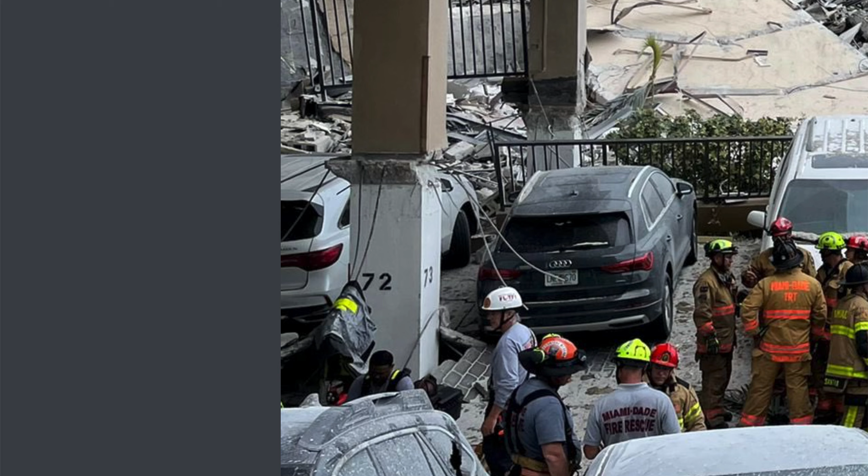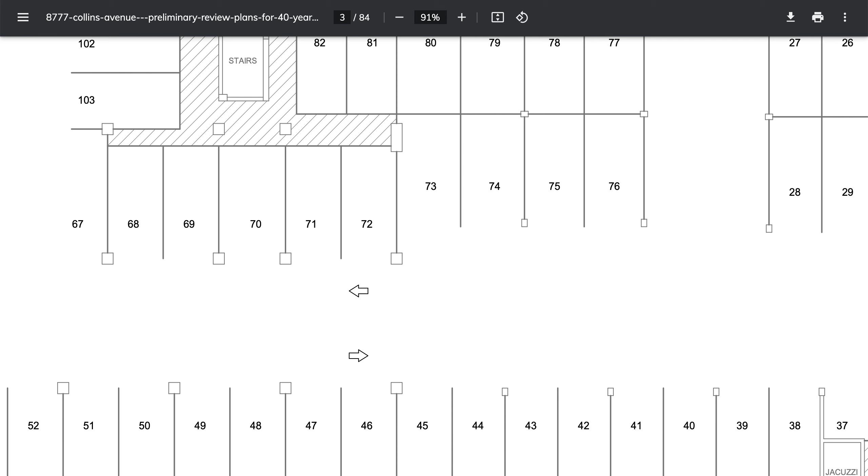This aligns with the parking garage failure. This is the top of the structure where the parking garage fails. Going back to the Twitter image people are sharing with me also, that's over here, but let's see if I tab over one, if this works. Not yet, or maybe it's over here in this Twitter one. So I zoom out, and there's the reinforcement. The reinforcement is going here, it's inside this image. It shows that the reinforcement is falling down.

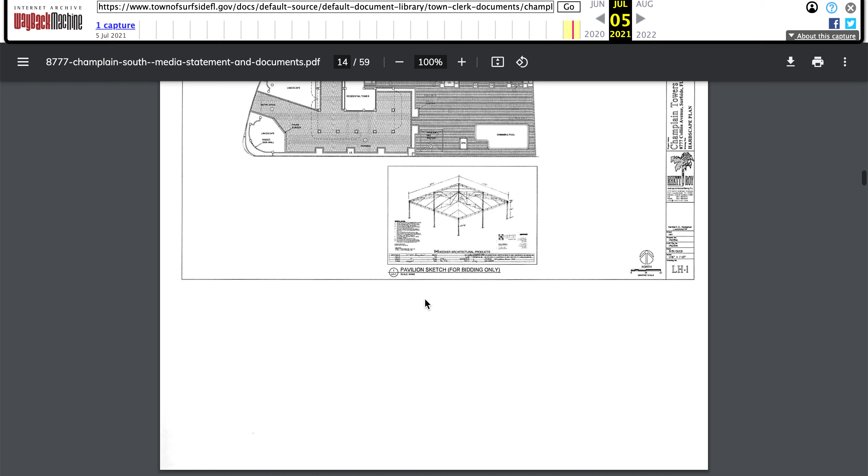Yeah, we're going to page 14 of 59. I think I sent the person, told him to go down to the bottom of this doc. Yeah, you can't quite read it. This looks like the failure, you can zoom in all you want. Maybe you can download it and it changes, but it looks like the failure area here on the deck side.

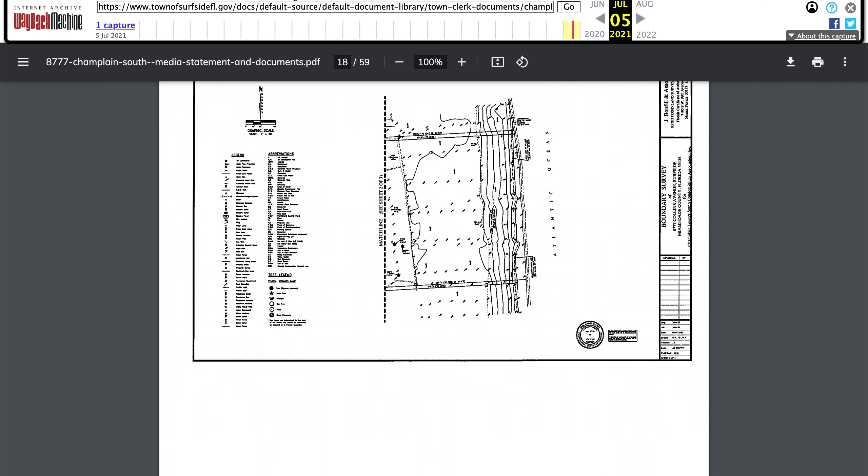There's data in here, but it's very small print. And that's right here, if you want to find it you'd have to drop this tab down. Yeah, you just go to the docs under media docs, it's a new one, I think it's near the top of the page. There's a page, 59 pages.

They want to do some reinforcement there into the piers and anchorage. That's pretty critical. Never happened.

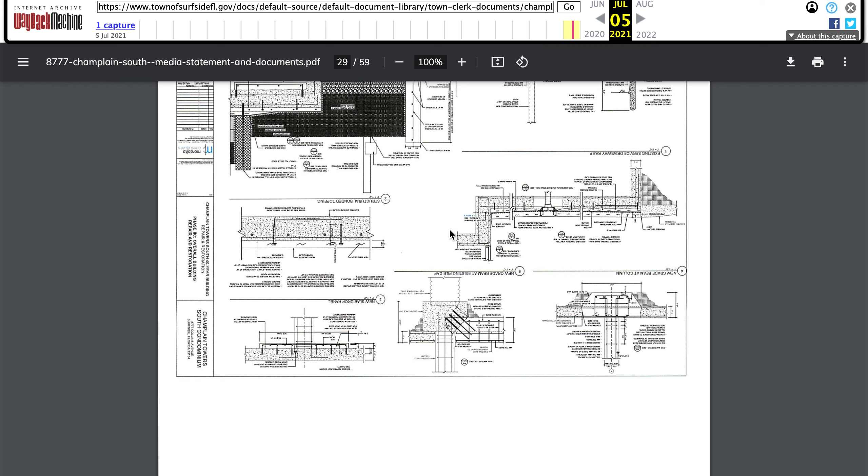Now I have an interesting statement. I have somebody from one of the boards call, I won't leave his name, but he's on one of the boards for the Civic Association. We had an academic conversation, and I said, they probably had a vote on these repairs a couple years ago, and the money's limited on what they can sue for, because there's so much of it, and it won't go around enough.

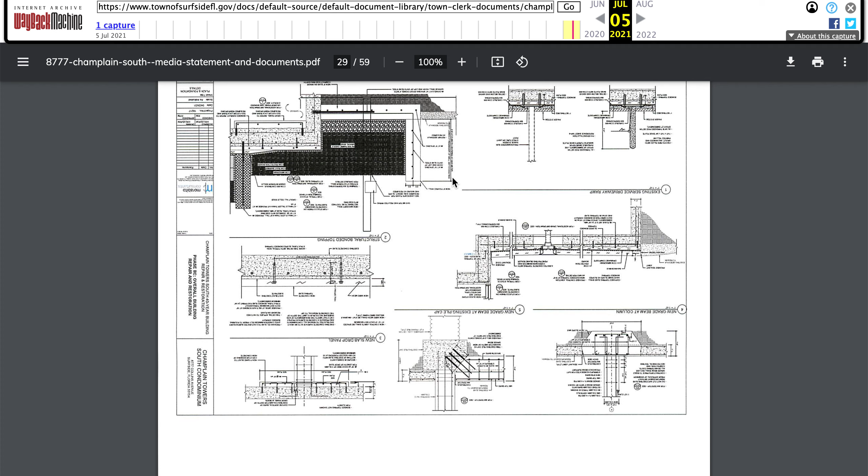So I said, you know what they should do? They should look at everybody who voted in 2018, if a vote took place. Everybody who voted against giving money to do repairs shouldn't be part of the lawsuit today. They should say, you can have your lawsuit, but you're last.

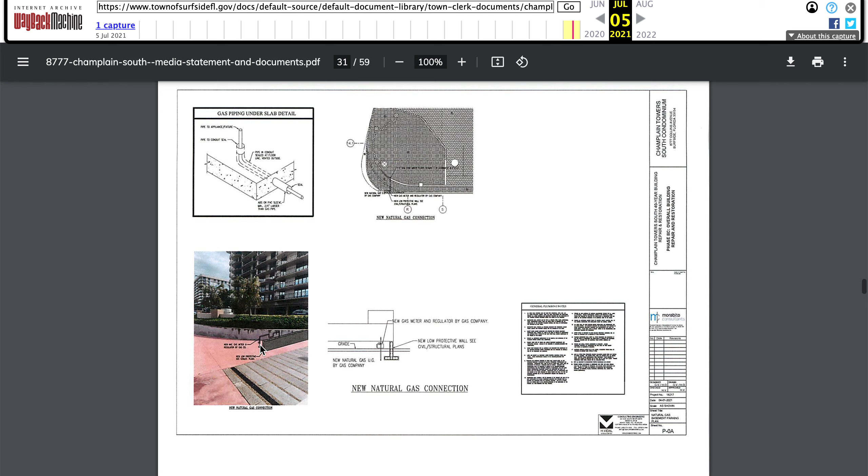The first bit of money, everybody who voted to do the repairs and adjust and pay for the increase should be the first members to collect on the money that might be present.

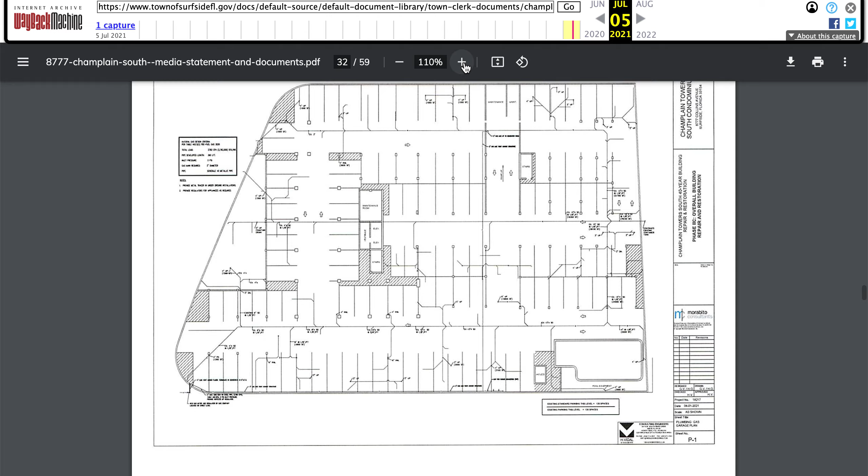Now, these are your lines. See, I'm trying to zoom in, but as I do, I lose it. So I might be able to download this file, and somebody else might beat me to it, and you'll get more clarity on what the lines are.

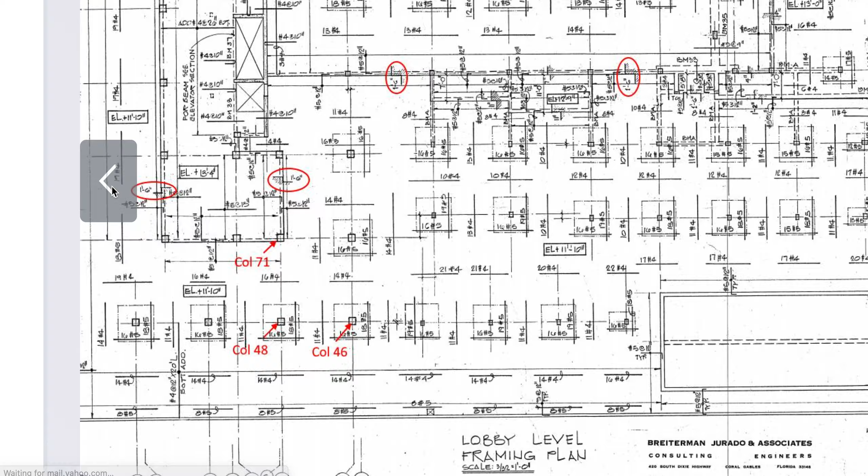The person sent me an image, this one. It says this is what the 1'6" looks like, and in their opinion the 1'6" is this beam, and here's now your elevation change of 1'6". So even though it may not indicate well here, this would be the garage floor before you step up into the building, and there's your 1'6".

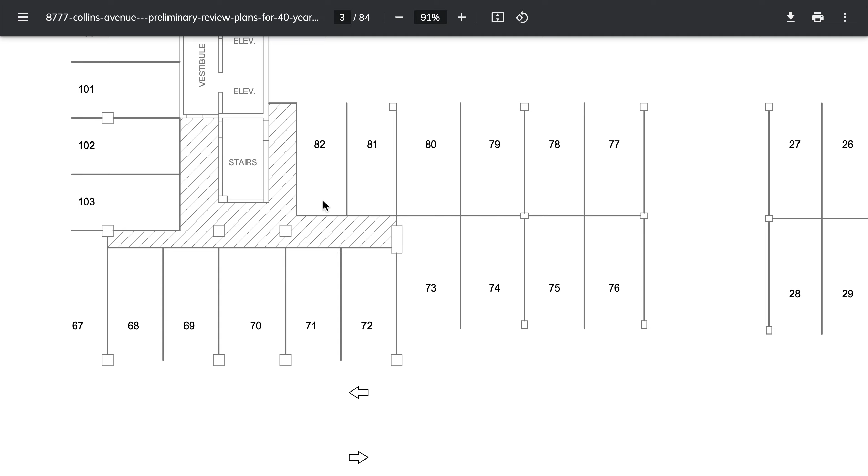Let's go to the drawings. So he's saying the 1'6" is here, not here. The 1'6" is here's our elevation change, which I need the actual drawings to show you.

Let's see... where'd you hide out? Where'd you hide out? I had them up and ready, but okay, let me skip over to this first.

I had an engineer who's trolling me on here, and you're not the first one to try to troll me, and I'm going to be quite nasty in a minute here. So they said you should use a finite element program, specifically a STAAD program, S-T-A-A-D.

STAAD, they can try to model your program. You put in the size, members, etc., and they'll try to find your moments, your issues you may have that you have to resolve.

This is equivalent to saying this doesn't work. This works with new construction. It does not work with 40-year-old construction. I can't enter into this no matter what they tell you. You can't enter into this.

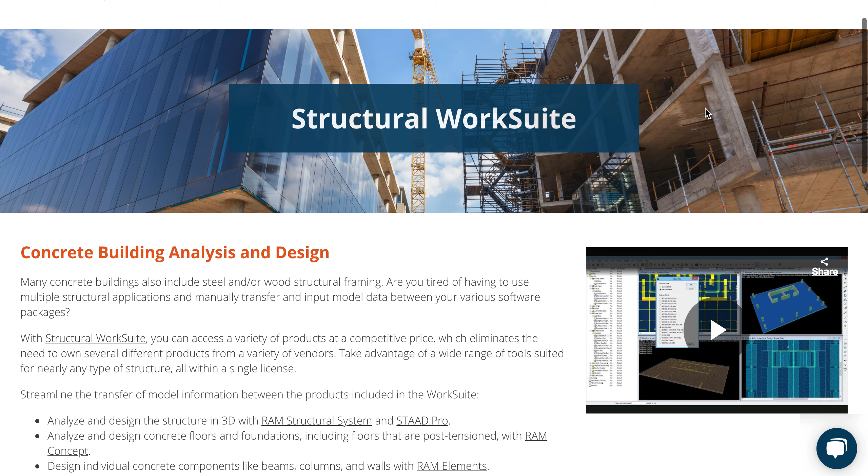Okay, I'm entering in now on this beam the contractor put in, because you'd have to know what each beam was like. This contractor put in a beam with the profile steel here, here, and here. He used a steel that was really tested at pull-out at X amount of strength, and he used concrete that was 4,000 psi that really failed at 3,600. So you would have to know all these details to redesign a building, and then you would have to add 40 years to it. How do you put 40 years of use onto this?

This should be equivalent, some of you mechanics out there can understand this a lot better. You're buying a 40-year-old car, and I tell you, hey, how's my car, run it in your software program. You're like, my software program runs on new cars. You're like, run it on my new car.

Your car's not new, it's 40 years old. So it takes an old school mechanic to get there and start looking at every single joint, every single connection. They say, okay, look, you got some ball joint problems here. You got disc brakes, but they're okay, they met the requirement then. Your lines are rusted, you're gonna need this to make this work.

So telling me that I have to run a program like that is telling me you don't understand structures, that you're a PE and you don't understand structures' behavior, that they will not behave. A 40-year-old structure will not behave with all that, and you need to know how it's built, like any of these programs can run. There is no model for it.

If it's a new construction building, you might be able to run a model for it if you knew exactly the layout of the steel, because this was all in situ, done in the field, placed together. We don't know what time they removed the form, so what was the actual PSI testing of this? The pull out - we don't know a lot of this stuff.

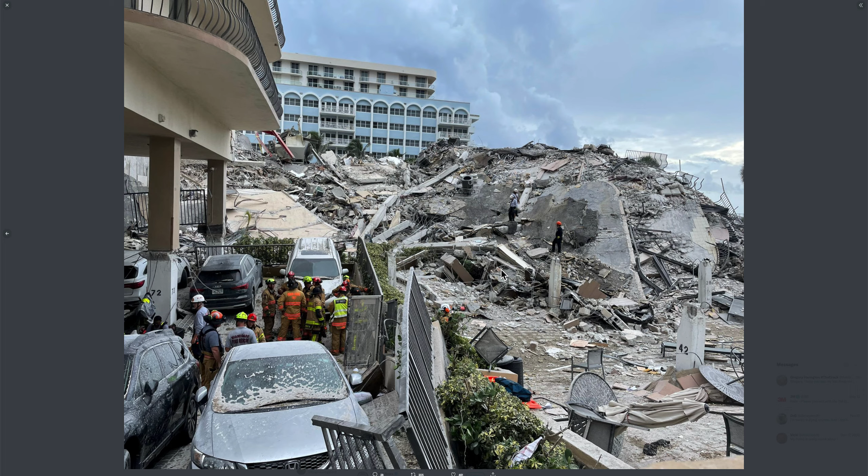All right, so now we have the - okay, so there's two images in here or not. Let me see, no okay, I don't see two images. So I can get that, I'm starting to eliminate it. I'm trying to get back to the 1.6 here.

The elevation change into the lobby. So they changed it, they sent me - oh right, they sent me a photograph. All right, so there's column 46.

And so this is 48. This is where, oddly, this is right about where they were going into the ceiling to try to find somebody. Isn't that odd? Because isn't that 48? If that's 48, doesn't 48 put us outside in the damn parking garage area, above the second deck and the open air? That is the confusing part.

I'll get to the comments. Isn't this out here? Here are the columns coming up. Here's our elevation change, here's that curtain wall, the glass wall, and this is outside. So we see them drilling in the parking lot, but it seems like they're there. But because it seemed like it was open there at one point, apparently they were drilling somewhere else.

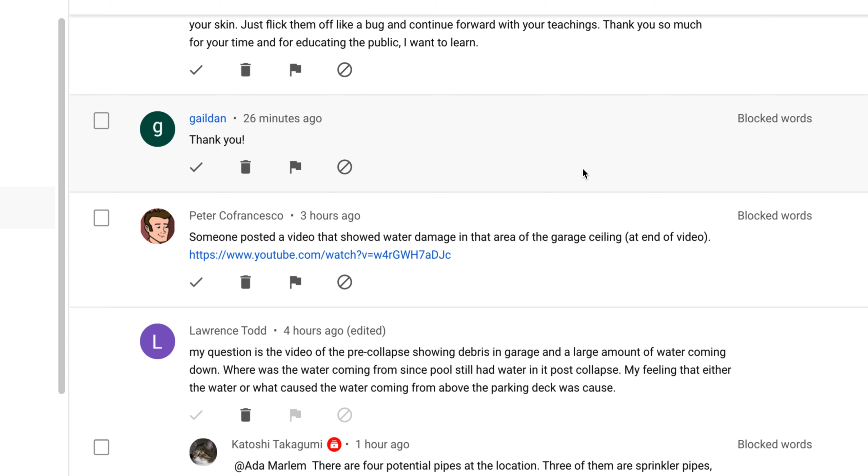We need to get those columns. I know one was red at the bottom. All right, so that was interesting there. And this wire doesn't appear to be in the way in the video. The 1.6, where the hell is that drawing now?

So I go over - I already told you about this. This is a simple metal detector that will tell you the depth of your rebar, so you can help figure out the profile of the deck, where the steel is.

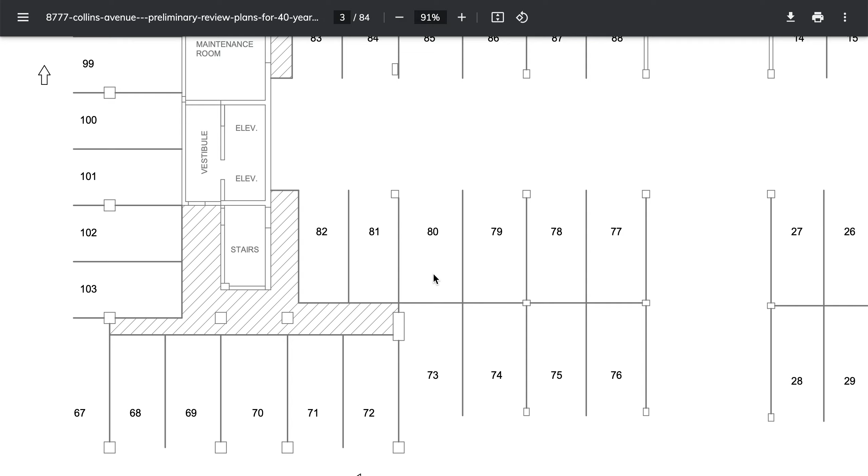All right, so then we have all these cars out here. Here's the end of the structure with the cars parked here. And then here is where you go into a doorway, elevator, vestibule, elevator, stairs. So you're coming to the structure. Let's see, she comes out of that room. Oops, that's the ramp, right?

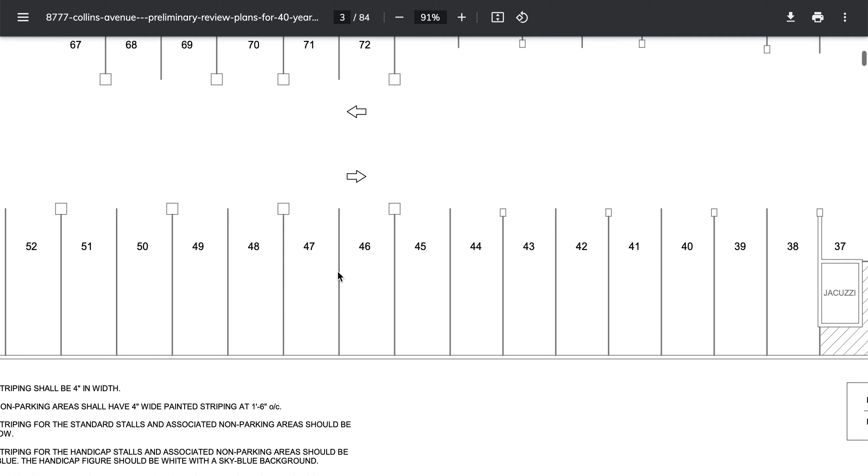This is the basement level. So I'm visualizing the basement level from this point. Right, that's what I wrote the guy, saying he got me in a basement. But let's go with 72. Let's go, where's the damn video?

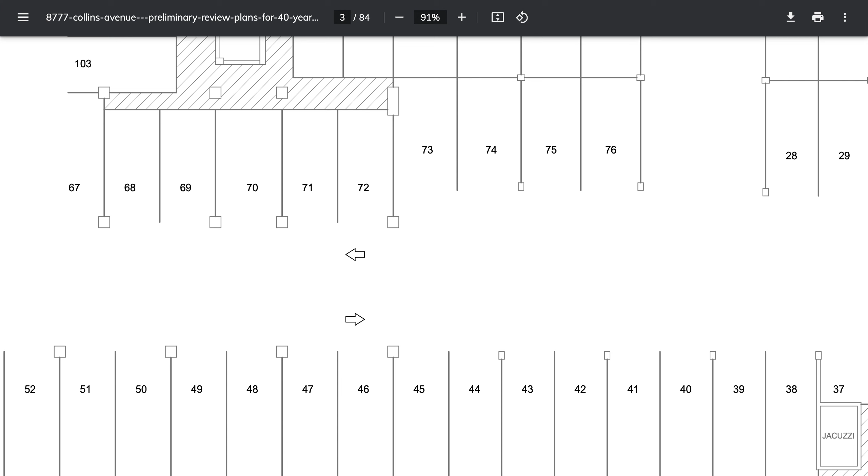So there we go, let's fast forward a bit. So there's the cars out there. And press play. So there's the elevator shaft - elevator shaft would be here. So that person filming is in the upstairs level above the vestibule here, and this is the maintenance room. The ramp's over here. So let's do that again, back to the video.

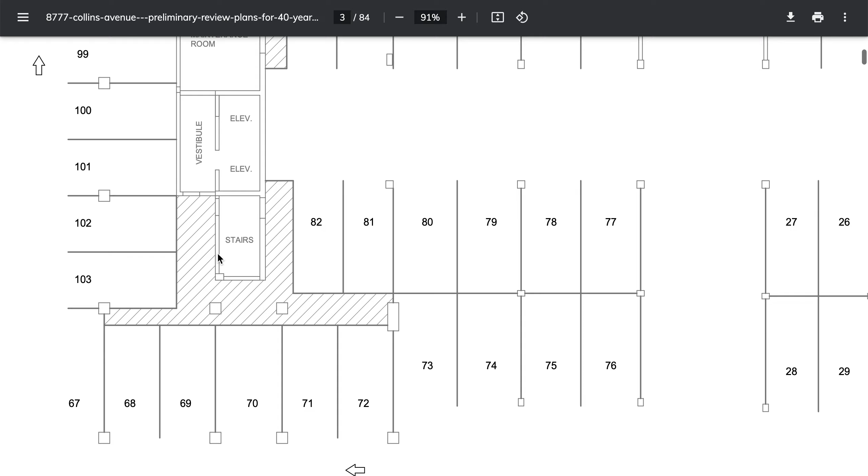So there's the entrance, left turn. There was a car, see the car to your left? So the car to your left would be on the first level, and that would not be on this level because we're in the garage level down low.

So there's the ramp down low. There's the cars on the top level, and that's the exterior wall. Again parallel there, so there's the cars out there. Let's go above. Well, they might do a bit of a bump out at that point, but then you get my intent. See the bit of a bump out or recess there.

All right, elevator, and I don't know if they're going to jump upstairs yet, but I'll jump to the end of the video. That was magic, he disappeared.

All right, it's room 611. This room, you guys can look at it, it's the same as the room in 711 where the cracks happen. So there's nothing really to beat up there at this time, but we'll go to the garage.

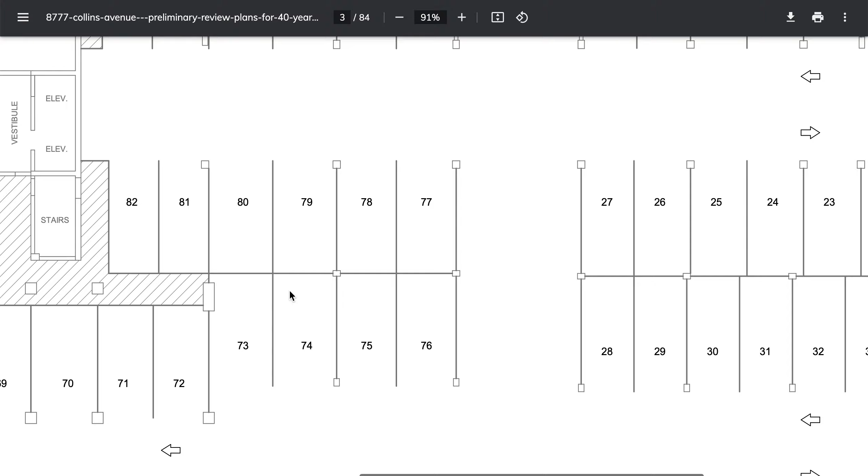So she's standing here, rotating. We got a pool back here to the right. Where's the pool? Okay, there's a pool. So she went down the elevator apparently, and there's 106. Came through the elevator, the vestibule area there.

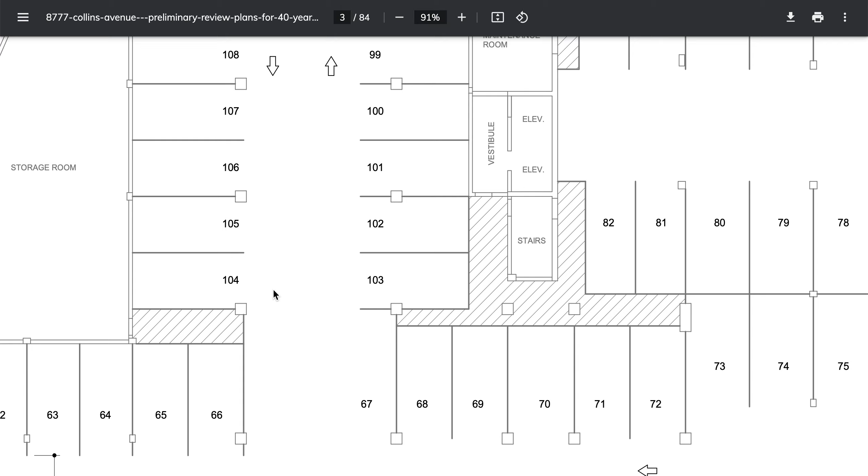I think she walks through here at one point, but there's 106, there's 105. So we're not looking at anything special yet. Now let's go on with that. Fast forwarding, I'm pressing the one key at a time. 106, 105, so there's 104. And so there's 104, oops. 104, so 104 is next to it.

So we go to, what the hell are you? So there's 104. So she turns, she sees 66 and the back wall, 53. So somewhere about here, rotating. We're going to quickly see 66 and the back wall, maybe nothing there, and then a column, 52 or 51. Let's take a look, so right there.

And I'm trying to pick that one off for you. There's 52, so there's your 52. So she turns, she sees 52. I believe this is 52. Remember the pool's down there. This is where our collapse happens, right about here. Let's turn, let's let it play. So she enters towards 52.

She turns left, there's number 50. So she turns left. Where's my damn map? I'm going to push this over, tab over a little bit. So now she sees, this is what we see her seeing, 50. She's very close to seeing our failured area, which is right down here.

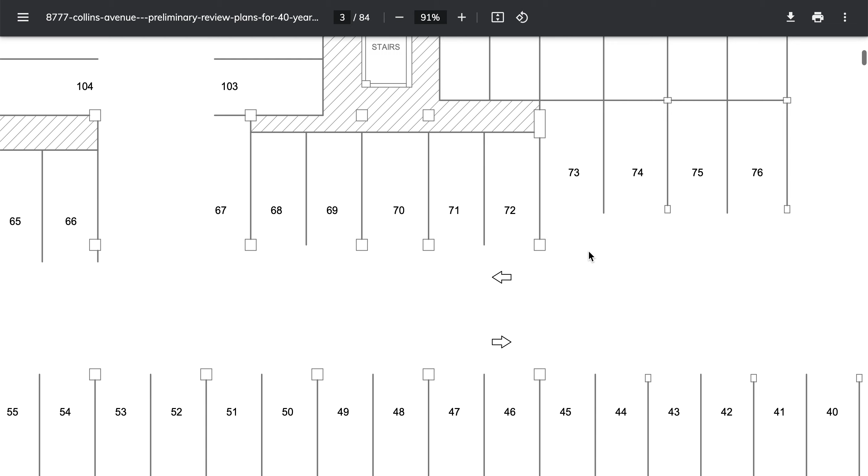It's 52, yes, I noticed the 5-mile-an-hour ramp. It's speed. Yes, I noticed the water. I noticed the floor drain is what I noticed more importantly for you guys, that are apparently a floor drain. So I don't get the water being such a big issue. There's a floor drain. The walls don't have water stains on them. None of this is yellow.

There's a trash can now floating in the air. It looks like a couple low spots in a big area, possibly coming from the ceiling, from the rain. They were going to take all this out. If you remember, this guy was going to really go at it, the engineer, so they knew about it. Again, who voted no to this two years ago, whatever the program was two years ago? Should they get a big say?

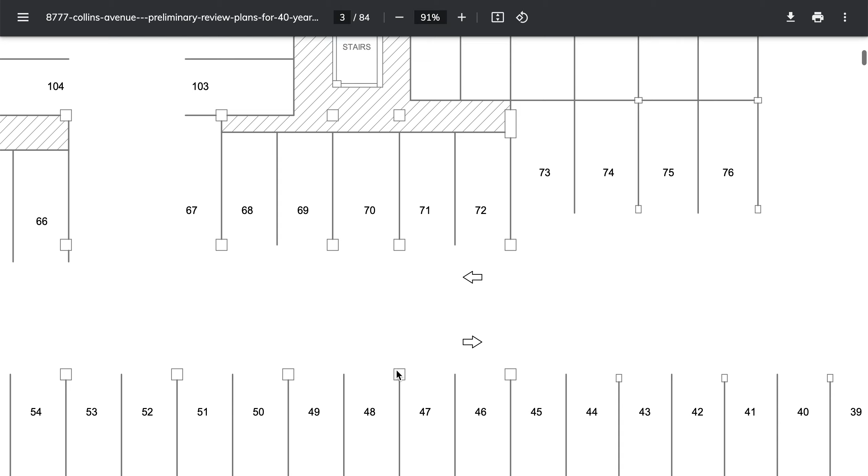All right, so she's getting closer. She's right almost on 52. Rotates, so we can triangulate 50, 52, 50. Let's see where she is. So 52, 50, so here's now she's almost where we can spot it. 48, 47.

He's almost there, 50, 48, and then the next one down, we can spot that one. There's that red. So okay, so 52, 50. I can see these two columns. I can see 48, and now we can finally see this one in the distance, and we can even see these guys, the smaller scaled ones. So we are at 46.

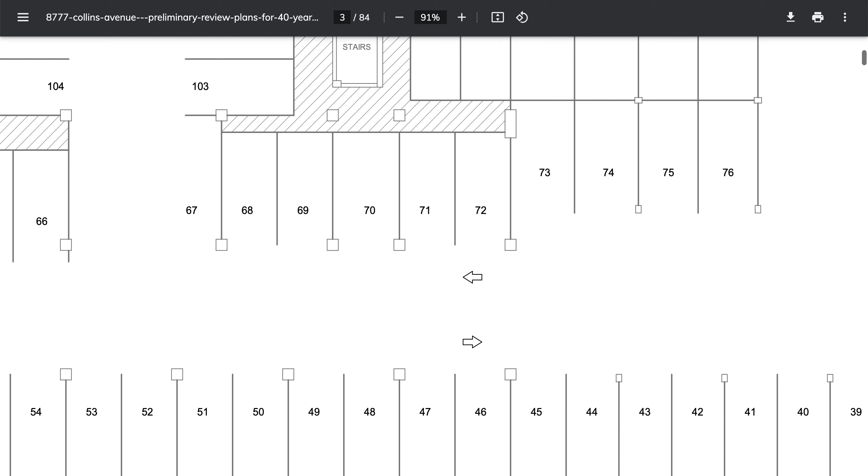So 48 is there, it looks like an 8. So here's 48. Going back to here, 48 is right there. She's right there on top of our failed section.

And I got to overlay in my brain - this is the first floor, right? So it's only 2 cars that come out, or 3 cars. Yeah, 3 cars park up top, 3 or 4 park up top. We'll get back to that. Oh, here they are - 1, 2, 3. Well, one partial, and I think it's 4. So 1 partial, and then 1, 2, 3, 4.

So 48 splits. Right at 48, that's a split where the car rotates. So right there, 48. So this car is leaning down, and these are in place.

1, 2, and 3 out to 44. South to 44, and then we see 42 through the floor, right? We see number 42 through the floor out here, which is where...

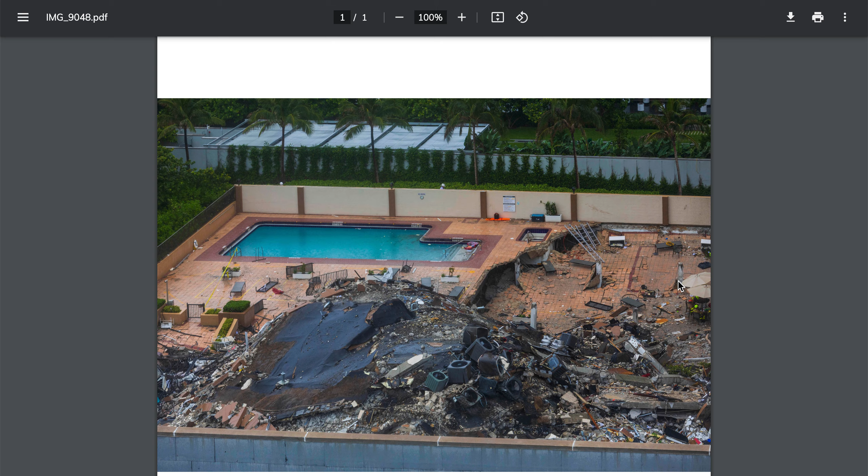I'm trying to find imagery. So that's 42 there, that we see through the imagery.

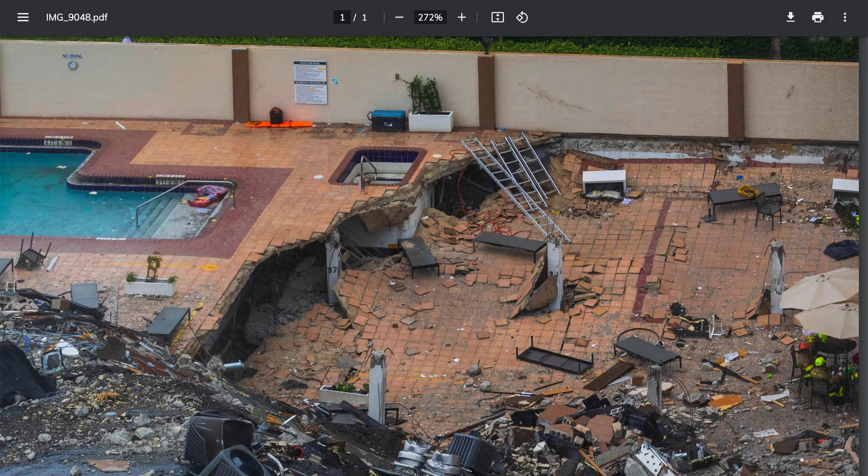Do I go back to this? Okay, so there's 42, and then there's 40 and 37.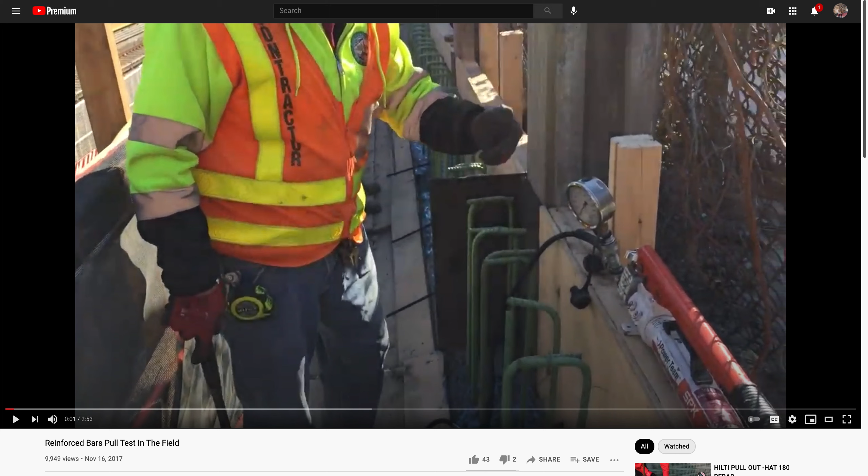Pull test, I already went over that with you guys.

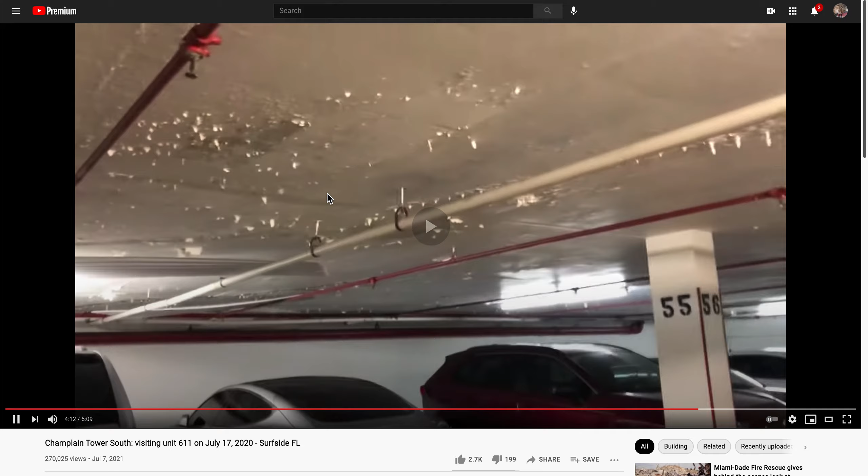Alright, so she's rotating, 55. Very interesting, she's at 55, and then, bam, between 55 and here's 56 here. She then finds the repair, the ceiling repair that I've been looking for 900 years. So here's 55 right here, I believe, and it goes back towards this direction.

This is not a failed section, and as I stated to the one engineer who called me on the phone, I said, look, I don't care what that repair looks like. It may look like shit, but I don't see that repair as failing, not because of the location, because I'm doing this live with you now, triangulating the repair, but it's not open.

The sides of the epoxy don't show signs of fracture or opening more, so it appears the repair is down here in this direction. It appears 55 is where... so look to the right, there's a pipe, it's 55. Oh, it's before 55 then. So here's 55, so it's somewhere about here, and some pipes are there, going back across.

I don't see that crack as an issue. Let's see.

Oops. Shit. Trying to get a sharp image.

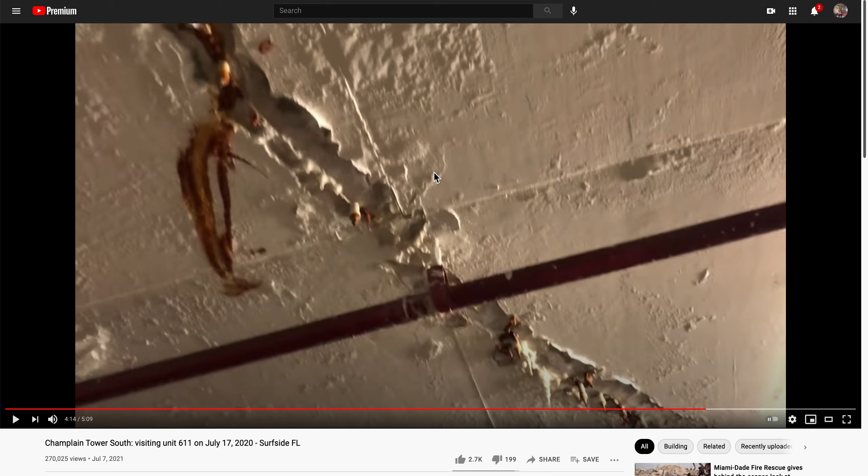We'll take that one. If this is the epoxy, as my man said, it'll look like stalactites if that's it dripping through. Look on each side of the epoxy - I don't see a fracture, I don't see anything that indicates a fracture. And these are the little portals, I think these are all his portals for epoxy. Hey, looks like shit, all right? But I don't see the fracture on each side of it.

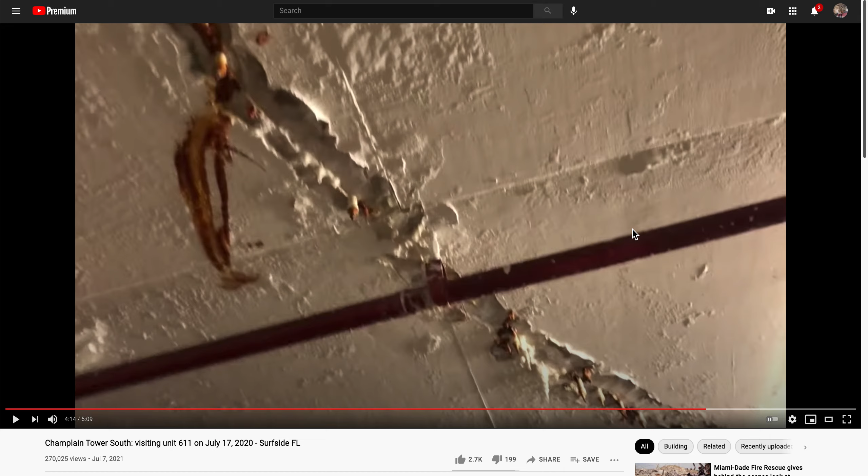It's academic, it didn't fail at that location. We have no evidence it failed at that location, and it's part of building demoed. So much for the epoxy being an issue in the cracks that I asked about for some time. I don't see that being an issue.

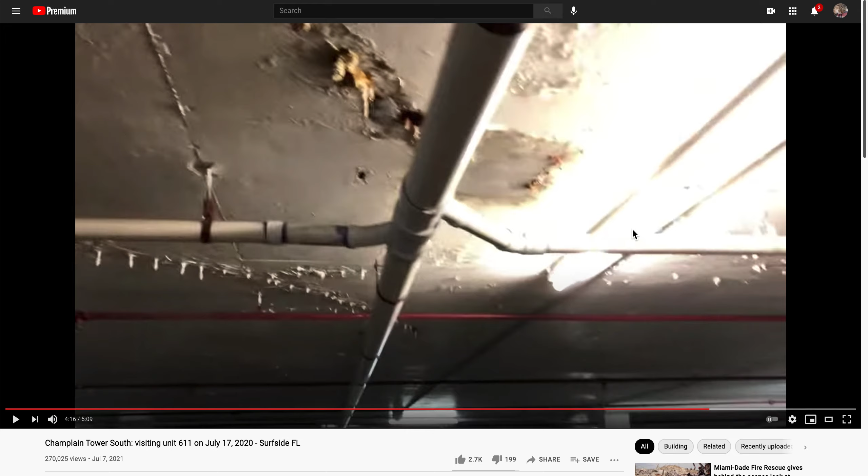Let's come to the right. Let's see if I can triangulate it better with the columns when she turns. So it stops about where that pipe is, right here. Right after the pipe, and then parallels, and then the pipe is my indicator. So before 66. Well, that's interesting.

That's interesting because I said it was 55, and then I said it went this direction. When she turns, maybe it goes this direction. That was intriguing on its own. Let's do that again, that's worth another bite at the apple.

66, 65. 65 is 66, 65. 55. Well, that was nice.

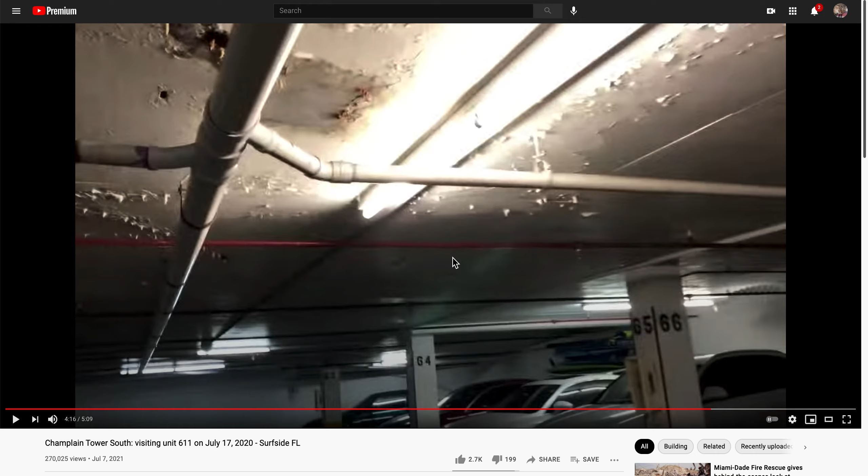I'm going to let it play for a second, let it rotate. She doesn't seem to be moving, so I need her to parallel. There we go, so she's going to parallel that one. She's still rotating in this spot. Please don't move yet, there's the standpipe above her. Rotate, rotate, she's moving. Alright, so let me spin her around.

So that seems to be the driveway down there where parking goes a different direction. So she's here, and maybe that crack does, even though it looks that way, dissect 50, 60, 56, 65. Maybe it is right here.

We don't have the floor. We have the cars up on the deck up here though, a Volkswagen or whatever it is, on an angle. So that crack, I'm not going to chase that. You guys can waste your energy triangulating that a little better than I am, but it's not worth it.

Okay, so what did we discover? Yeah, she's got pictures of the ceiling and all that. We already had the engineer's report that says it's shit, that he needs to be repaired. So he knows that. There's a swimming pool down there that everyone cried about. You saw the floor drain.

You should have seen in this video, in the previous one - I thought one of you guys would have caught it. When you come down the bottom of the ramp, there's a big-ass camera. Of course, we won't get to see that camera. And I'm just trying to fast forward this video.

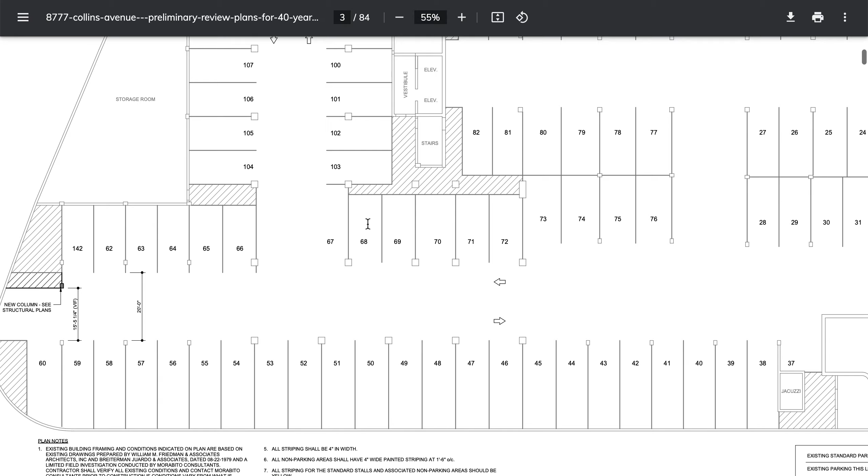So she's right here facing it, facing about this angle, facing 103. There's the stairs. Seems like she's great. I think she walks over through here and around and comes this direction, so she gets right underneath our failure.

Let's take a look at that when she starts hitting on 80s or 70s. Let's take a peek at that point. So she'll be at the ceiling. Let's see.

So 103, and then there's 1, 2, 3. So let's see where that puts us. 103, 1, 2, 3. We need to get out here, we need to get over here to the 74.

This is the stripped down one. This is the punch shear one, so that'll be 72 and or 40, 45. These punch shear too, but let's see what we can get.

I'm just going to let it go faster a little bit. So we need to get to the right, we need to get over there.

To the left, we don't need to get to. We already went over that with the ceiling falling somehow. Falling. Like I said, I think she goes around this car and then doubles back over towards our area of failure, which is awesome.

I'm pressing the 1 key, the 1 second frame. So I think she's going to go right where we need her to go, which is beautiful. Okay, so now she's coming this way.

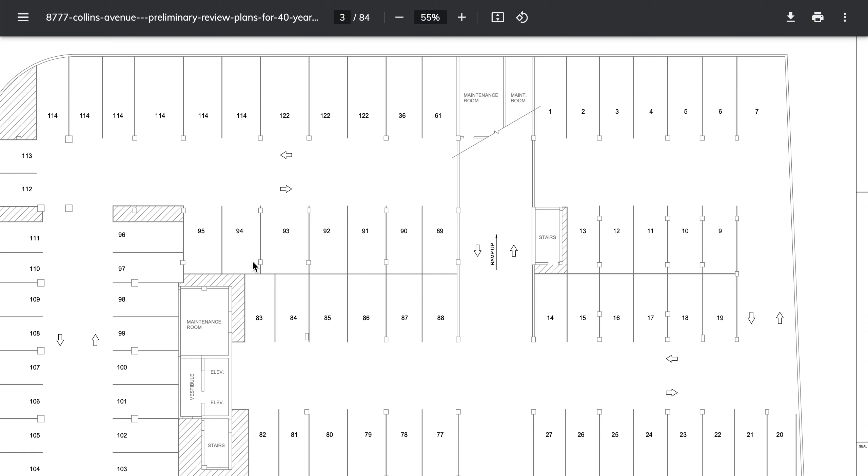So then it steps back to here, then you got a hell of a step back. So here's that bump out. Here's the wall here, the stairwell coming down. Here's the facade, the face of the building. Let's see, maintenance room, and then maybe that's an entrance to the lobby.

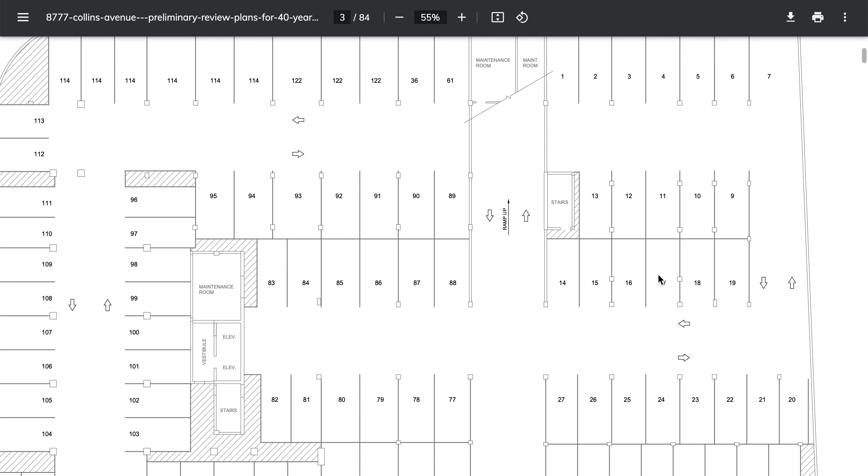Time to get to that drawing. I know you guys might not like this, but let's do it. Let's remember 16, 17 is it. So you got to remember that this is 16, 14, 15, and these are in line with each other.

There's a transfer beam here. You got to remember this, sort of throw this in your brain. These two cars, these are in line with each other. You got to sort of remember that for a moment.

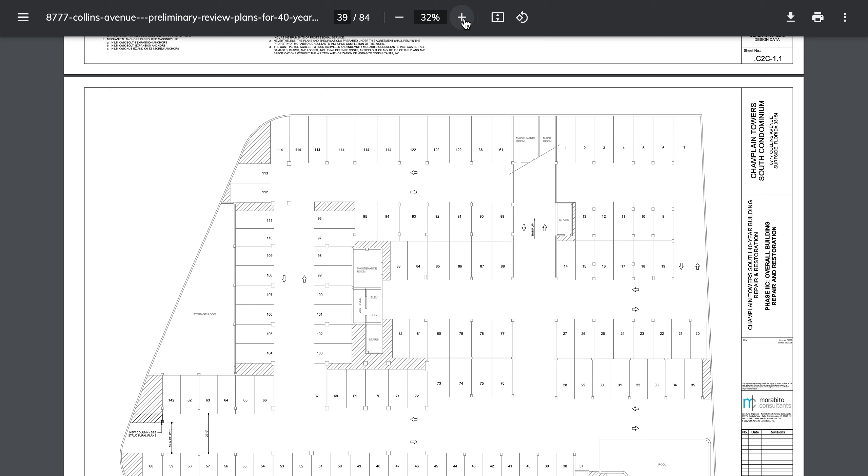Let's go to 29. Oops, I went too far, but let's go to 39. All right, hey, that might work. So this is what I'm talking about. The ramp comes down, there's the vestibule, the stairs.

So the structure actually comes over. Here's her other stairs, her elevators. All right, so it lines with the elevators. So I need to come back more to be inside the structure. Here are my two columns, 1 and 2, that's 17, let's call it. And that's that other one.

I need to be in this row for the outer wall. Okay, so I need to be in this row right here. Here's the outer wall right here. And then everything from here is exposed. Little porch, step-ups, step-downs. And so right here, there's some stuff here where the deck is exposed and waterproofing is failing. And here's the inside the structure.

So this, here's the pool, etc. Right, so right about there, and we're standing, let's see, in front of the ramp. Here's the down ramp. So right about here's where we're standing, and right above our head is this screw up, the waterproofing. Kind of like the guy's report now. I'm getting more and more of a crush on his report.

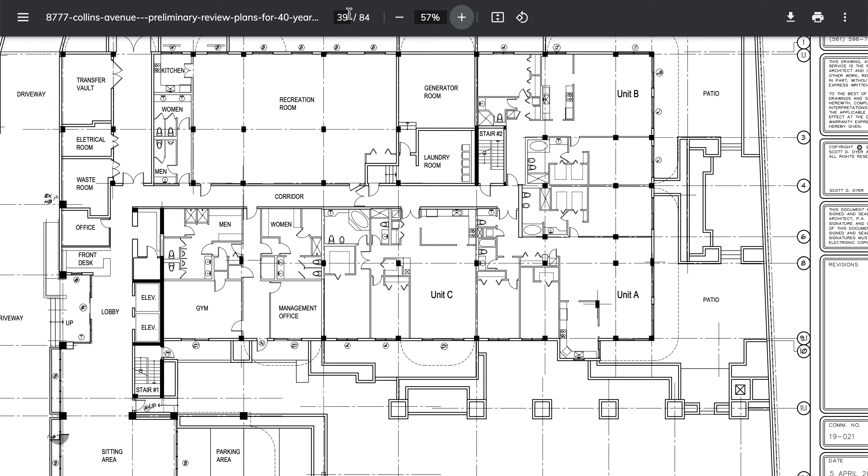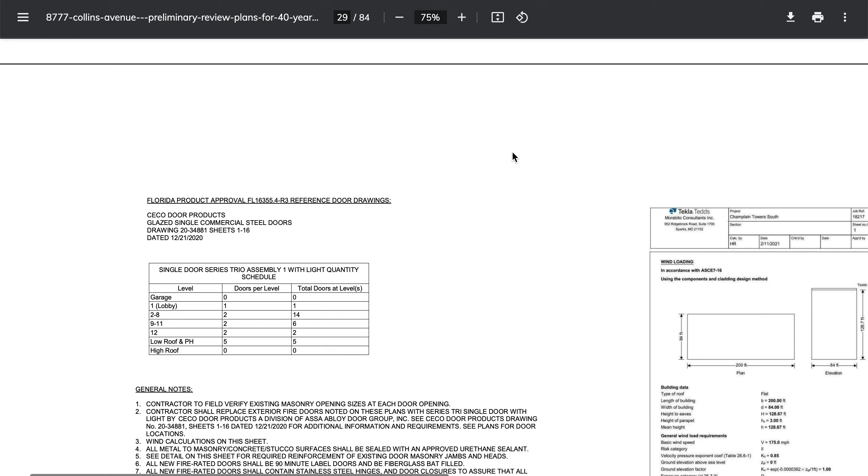How do I go backwards? 34 perhaps. No, about 29. I get these reports all mixed up. I've got them kind of screwed in my head. Preliminary plan. Oh, these are preliminary plans. This is the repair. I don't think it's going to be that evident in this one. I don't recall, so it'll be 24. Yeah, his overlay's not the same in this one. These aren't the plans I really want.

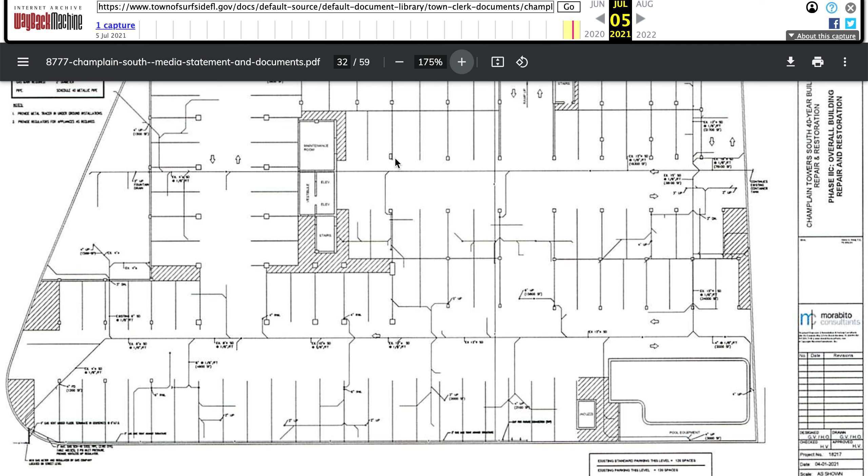I'm looking for ones for the column detail and the column and beam detail. Looks like that's not going to load right now. I think I can end this video with what I was trying to explain to you.

So yeah, I can see where the decking has acted like shit there. This is the plane, the last plane of the columns that failed. First we get this deck in here. I believe this is above room 101 or C, however you reference it. There's our shear plane path. This would create a nice little shear plane path. The deck failing would pull at these columns and definitely pull at the flooring here.

We got plenty of drainage of this. We got drainage, you got some little small spots, nothing to write home about. The ceiling is significant, obviously. That's where our failure happened.

Could you run a finite element program on this? I'm being sarcastic with that engineer who told me we should be running programs. This is the problem with engineers like that - they can't evaluate structures because they think they'd clear this structure, saying it's good because of flaking paint, but they can't enter that into their program.